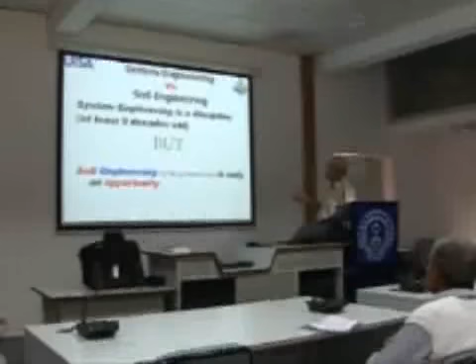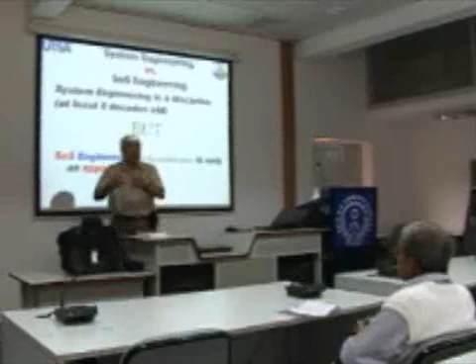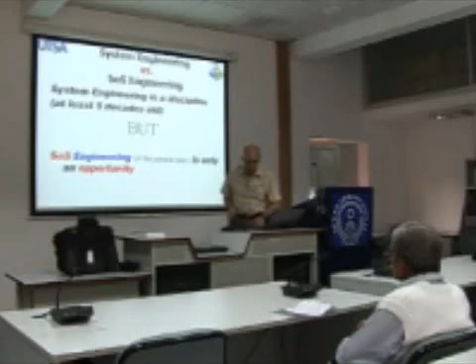I would like to make clear to our friends in the engineering field the difference between systems engineering and System of Systems engineering. Systems engineering is a discipline which is at least 5 decades old, but System of Systems engineering at its present situation is only an opportunity, meaning that we have a long way to go, because a lot of issues are not resolved, theory and application are not resolved. For example, here you see scholarly hits on Google up to the year 2005 on System of Systems versus System of Systems engineering.

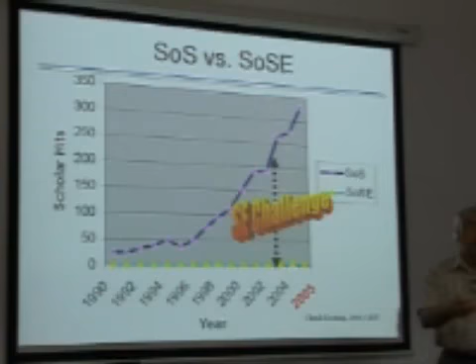The System of Systems hits are exponentially blowing up to large numbers, in this case around 300, while in System of Systems engineering at that time it was very low. So you see the big gap between systems engineering and the challenges involved here. It's our duty, it's my challenge, and people around the world need to close this gap between these two.

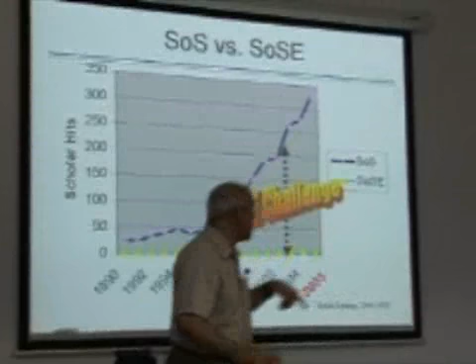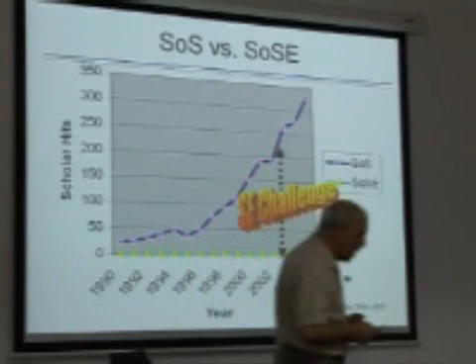Recently I Googled this concept myself, and 'system' is still over 1.5 million hits. This one is in thousands, only a few thousand. And if you Google systems engineering and my name, you get about 10,000 hits, and a lot of them are not relevant to systems engineering.

So here is system of systems. In order to go from system to system of systems, everything has to change. Modeling is a brand new idea, because you cannot model a system whose mathematical representation is not possible—you just have communication links between the two. Simulation, emergence, architecture, control, cybersecurity, network centricity, ethics—all of these issues have to be reckoned with, discussed, and a lot of smart people have to work on these problems.

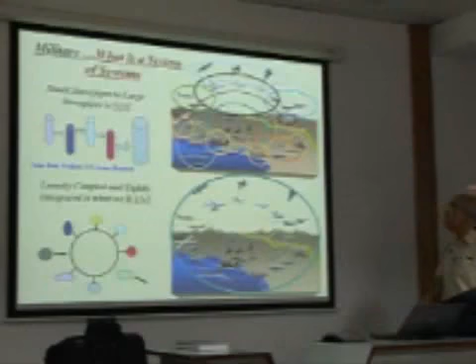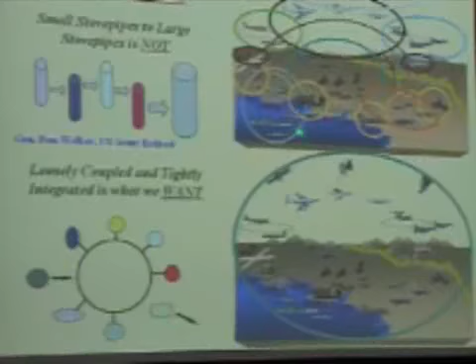So what are examples of this? Here is a military example of system of systems. In many applications in defense, especially in the United States, you have small stovepipes up to large stovepipes, a few systems here, a few systems there, but they're not really integrated into one umbrella, one together.

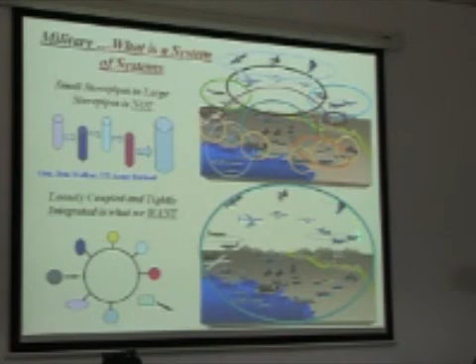What you want to do is couple them loosely and tightly, integrate them into what we call a network. So you put a network all the way around—everything you see there, you can put them all together. This will allow the American Army, Navy, and Air Force to work together, to put all their resources together. The word 'system of systems' is not my idea, my terminology—it's the Department of Defense of the United States.

My colleague Dr. Sahni, who was in Kanpur, heard a presentation from our friend Mr. Wilbur from Boeing. As you know, Boeing is trying to put the 787 aircraft into the market with problems, and the system for that aircraft is called E-Enable. E-Enable means that if this aircraft has problems in the air, it's connected by satellite and by ground to all the other aircraft and the control tower, and then the system from the cockpit will relay these things and warn them about the problem.

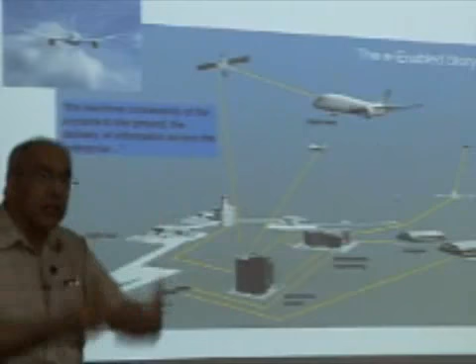The people on the ground know what is wrong with the aircraft before it arrives, and they make the parts ready, mechanics are ready, and when the aircraft comes, they fix it. So this is an integral part of it.

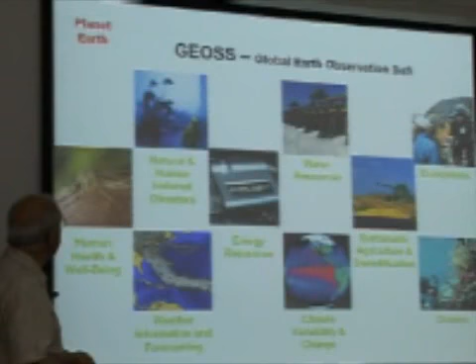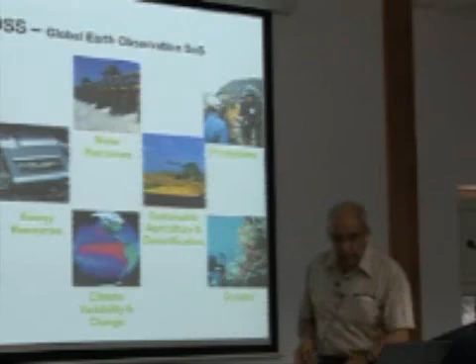Another application is what we call Earth sciences, a global Earth observation system of systems. Since the tsunami disaster we had in Asia, including India, the world has now been connected by a system of warning that gives early warning to countries like India so people can move inland before the tsunami arrives and causes damage and loss of so many lives.

An airport is a system of systems, consisting of baggage handling system, air control tower, plane with crew, freight, reservation, etc. So the entire airport is a system of systems. One aircraft is not a system of systems, it's only one system, but the airport is a system of systems. So is air traffic control—going from one airport to another is a system of systems which helps route the traffic and monitors the aircraft.

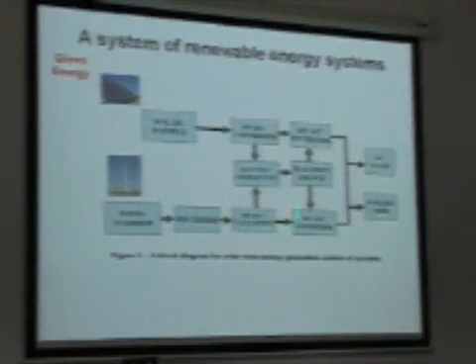So system of systems, you can also use the concept for managing them, to make the management more efficient. And that will save a lot of money.

You also have smart meters, which monitor the expenditure of energy in all your equipment in the house. This smart meter is connected to the local area network, which could be the province of Agra, and then it goes to the northern grid of northern India, and this spans the entire Republic of India. It can go from your home all the way to the Republic of India, network connected together. This whole thing is a system of systems. The objective is to make energy production and energy monitoring all automated.

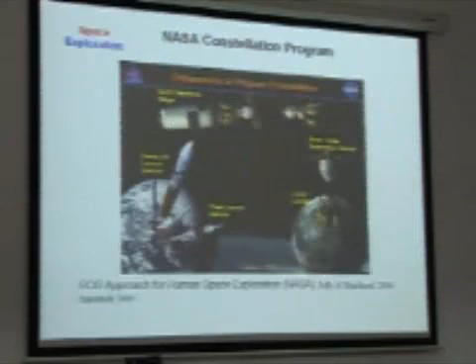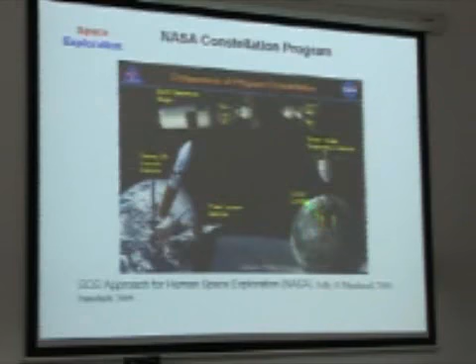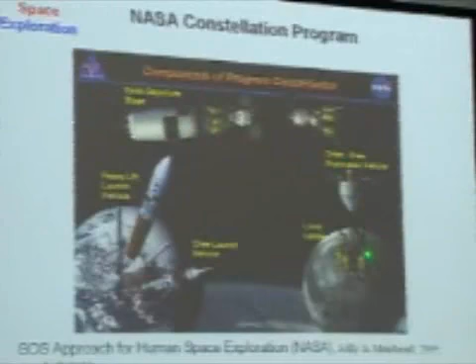If you want to go to Mars or the Moon, you can also use a system of systems approach for human space exploration. This is the Moon, this is Earth, and these are the rockets and vehicles which take experiments and humans to the Moon. So the entire group is a system of systems. These are all written in a chapter of one of my books, which I will talk about later on.

Modeling and simulation is another area that needs to be changed. You have to look at modeling a system where the mathematical representation of the constituents of the system are not physically available. Newton's law doesn't work, you don't have time for it, thermodynamics doesn't work. All you have is data going from system X to system Y, and that data is the only information you have. That data coming out of system X is the behavior of the model of the system at that instant of time, and you need to make the most of that information. So the philosophy of modeling has to change. That's the point I'm trying to make.

This is an application of a situation where a system of systems is used for recognizing a submarine which may belong to the enemy. All these parts of the system of systems are friendly, but this particular system belongs to the enemy. So in this case, you have not one goal, but two goals: the goal of this system is to find it, and the goal of the other is to hide from the enemy. So this is a situation where you have work done by two different groups. This was part of the work of one of my PhD students, Dr. Sridhar, a native of Bangalore, who is now working for Microsoft in the state of Washington.

This is another application of system of systems in the air transportation system. Every red dot you see here is one aircraft in the airspace of the United States. This is a visualization of the 2004 air capacity network for the United States.

This is a healthcare system of systems, where you have managed care companies, hospitals, patients, pharmaceuticals, regulatory agencies and government, clinics and nursing homes, and physicians. You have to connect them all together. Unfortunately, this is another example where you have contradictory goals. At least in America, doctors and patients need to have good care, but the insurance companies don't like to give it, they like to just make money. They would rather that you never get sick.

This is now a summary of what we are doing in Texas. Our research areas are air, land, and sea rovers. We have rovers which work under the water, as well as on land, with one exception. Then you have green energy activities, and another area which we recently started, cloud computing.

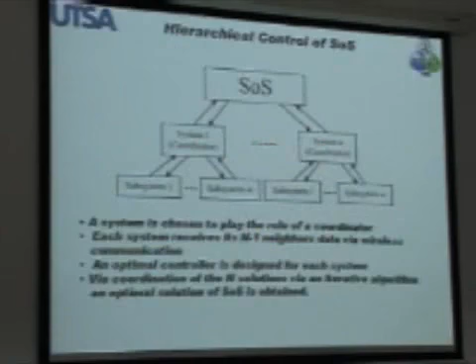Hierarchical control has been around since basically the 70s. Mesarovic at Case Western Reserve came up with the idea of hierarchical control, where you look at subsystems of a given system. From the top, their solution gets coordinated. From the bottom, they have isolated solutions. By exchanging information at levels, you iterate enough times to get a feasible and optimal solution.

In this case, a system is chosen to play the role of coordinator. Each system receives its n-1 neighbors' data via wireless communication. Then an optimal control is designed for each system. By coordinating this n-solution through an iterative algorithm, repeating communication of information, you come up with a solution. I'm going to skip this because it's all optimal control theory.

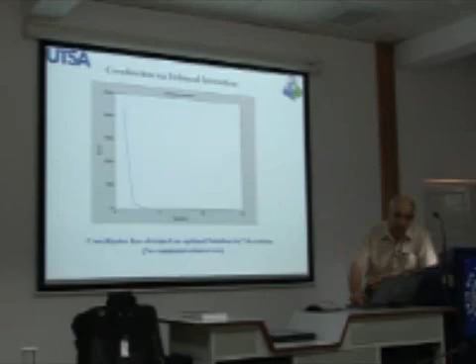So we go through the mathematical representation, which is assumed to be linear, time invariant, which itself is far from reality. But eventually, through a hierarchical control algorithm, communication error goes to zero. These 4 systems establish a normal channel of communication among themselves. At that point, the system has to be stable and has to give you the goal that you have been seeking, to connect them together in the first place.

These are some of the simulation results on Matlab and Simulink.

And you can also do decentralized or distributed control. Basically, you have n local controllers, which use wired interactions, wired connections, but you also have a global controller which uses wireless interactions, which will help give you an additional control component based on wireless information from neighboring systems. We call that global control.

So a combination of local and global control will help you, and you can actually show, depending on the amount of delay in the wireless connection and the behavior of the controllability and observability properties of the system, that this system can be stabilized, will become stable.

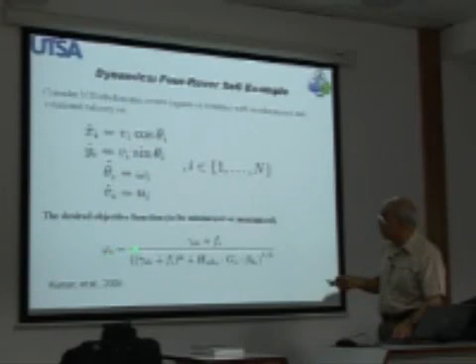A simulation of this was done by one of my students at Kanpur, Dr. Anjan Kumar, soon to be called doctor, and this is the objective function. These are the dynamics of n of those. This is the solution to the optimal decentralized controller, and these are some simulation results.

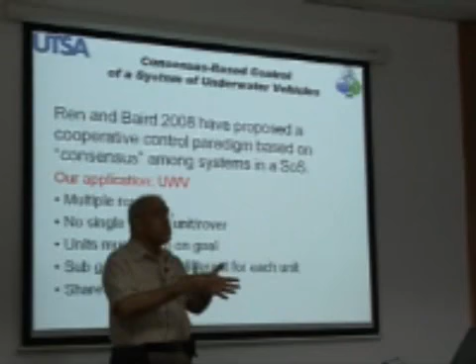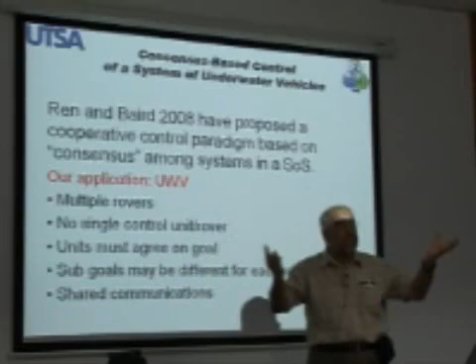Consensus-based is an area which my colleague Dr. Hadaegh from JPL has been pushing for another system of systems which he calls, and now is becoming very popular terminology, formation flying systems. Basically, you can bring telescopes, you can bring many different space vehicles into one formation, which will allow you to do a lot of good things that a single one of them cannot do. So consensus-based control has been used for that, in what we call cooperative control mode.

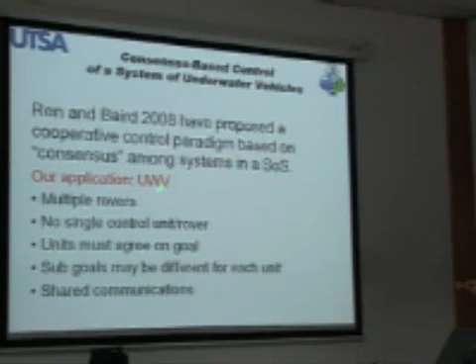In our case, we used it for underwater vehicles. Applications of underwater vehicles are, for example, going through this consensus communication among them. Multiple rovers are involved; no single controller unit or rover can do all the job. Units must agree on a goal. Sub-goals may be different for each unit, and you have to share communication among yourselves.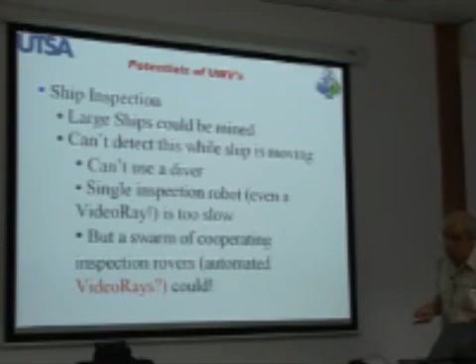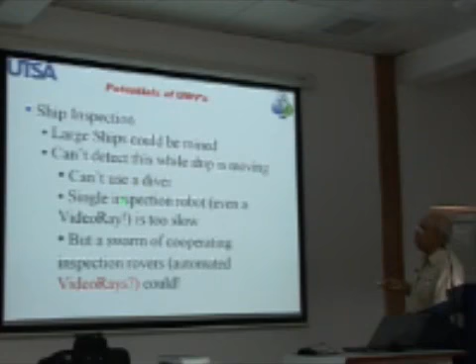So here are some of the potential applications: a large ship where you need to detect potential problems, detect maybe attacks or bombs or what have you. No single diver can do these jobs. A single inspection robot cannot do that, and it may even be too slow.

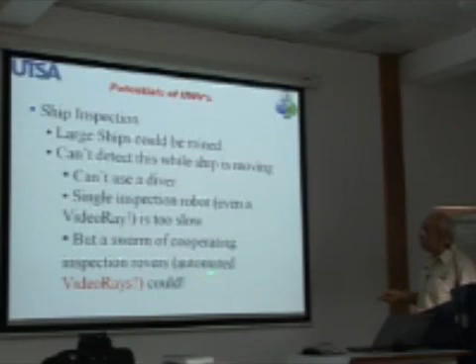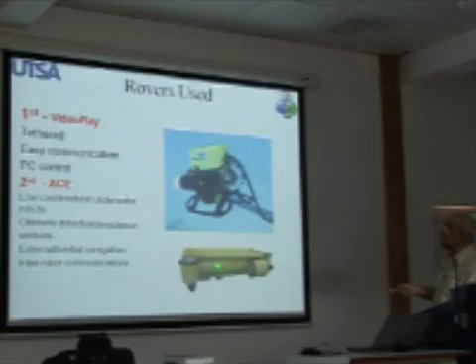So you want a swarm of cooperative inspection rovers, automated, for example, VideoRay robots which could go around it. This is a VideoRay robot. We have 2 of those in Texas, and this is an autonomous one which we built ourselves. So we have 2 different kinds of underwater rovers.

Okay, and then it goes to the next and the next. Ideally, you'd like to have a complete three-way talk directly, but normally you cannot do that, so some of them may not even get the information. That's what makes the job of control very difficult. When you go through the cycles of the token passed from one vehicle to the next, you eventually look at an index called J, which needs to be driven to 0.

And then you basically come to the point where, if you want to increase the speed of the rovers, you shorten the distance and they move faster and faster.

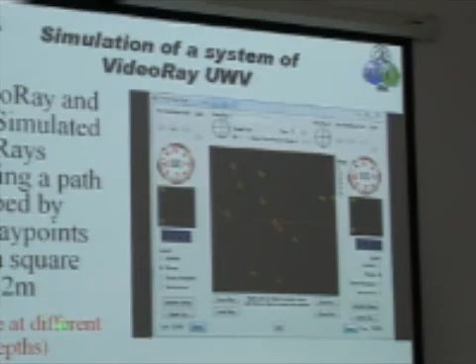Here is a simulation of that scenario, with a combination of real underwater vehicles and simulated ones. Those in the circle down here, those two are real UWVs, and the rest are simulated UWVs. We did that for different depths—they all have different depths—and we use consensus-based control to run this controller.

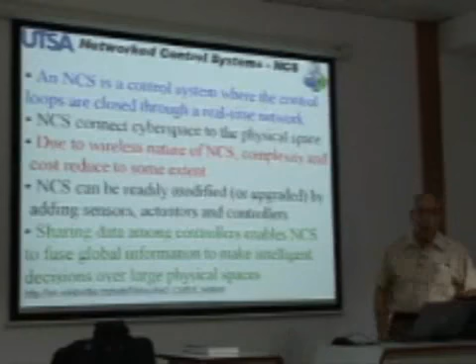And now here's the network control. Network control is an integration of cyberspace and physical space, as it is in other ways. But due to the wireless nature of network control systems, complexity and cost can be reduced to some extent, because the information that you normally want to go from one system to another goes through the communication channel—you don't have to dynamically represent it in the model, for example.

And this can also be modified. You have a situation, as we said, where the control loops are closed through a real-time network. That makes it so tough. Sharing data among controllers enables these systems to fuse global information to make intelligent decisions over large physical spaces.

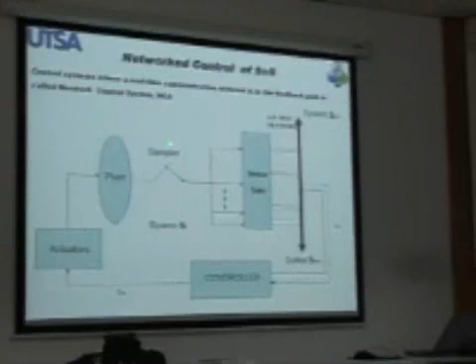This comes from Wikipedia. Here's a block diagram of a typical network control system. Here is one system—it has a sampler. You have information coming from sensors. Some of the sensors are connected back to the system, but some, this dotted one, go through an ad hoc network. That ad hoc network has nodes on the sensors, on the actual controllers, and also nodes from other systems, I-1, I+1, and so forth.

The controller, after a time delay, receives the information from the sensors. It does its own implementation of control laws and sends it to the network through a time delay from controller to actuator, which is on the plant. Therefore, you have two delays—we call them forward delay and backward delay, and they are two different animals. They cannot be treated the same way.

As you will see, the backward delay can be handled by a Smith predictor. The forward delay has to be handled by a non-Gaussian distribution of noise, which we call Levy's alpha stable distribution. Communications could be by field buses, control area network, local operating network (LON), Ethernet, Bluetooth, Zigbee, and so forth. My students are actually using most of these in the lab right now.

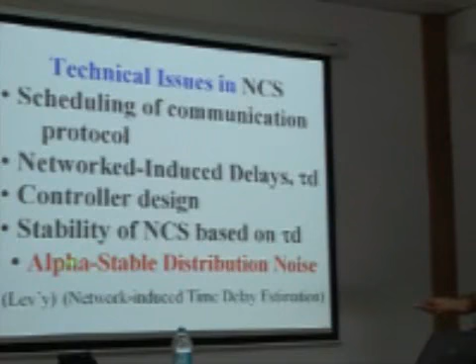Fortunately for this problem, theory is there. You can have the delay in the network be less than an upper limit to guarantee stability. I'm actually teaching that in my classes this semester. This is the forward delay, which has to be estimated using alpha stable distribution of noise. This theory came into the mathematical world from a mathematician called Lévy in the 1930s, used for estimation of network-induced delay.

For my students, before I taught them network control, I had to teach them control, modern control, time delay control, and then bring them into real network control issues. Let's say you have a plant here, a controller, in this case a PI controller, and a delay. Unfortunately, delays are not lumped values which you can put your fingers on. It's distributed, it's random. It's very difficult in network control systems, which is a candidate for system of systems.

Without the delay, the system is well behaved because of the location of the poles. But when you add the delay, the system becomes unstable. That's what we are trying to avoid in real-time system of systems control.

What we did next is approximate that time delay using what we call Padé approximation. We got the same behavior.

Next, we used a Smith predictor to reduce the effect of the delay. A Smith predictor works like this: you come up with a model of the plant, a model of the delay, find the difference, and feed that back. This came from a control engineer named Smith in, I think, the United Kingdom in 1957.

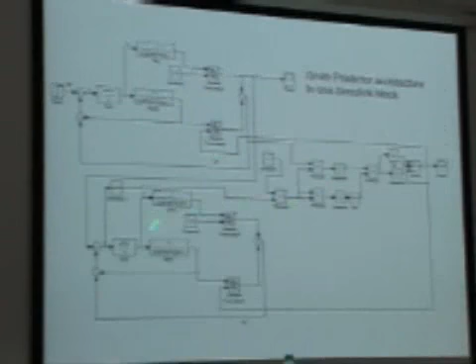Now, if we put an adaptive loop on it, shown also here, we have the plant, the Smith predictor, and all the logics and dynamics for the adaptation using least mean square minimization, sort of like a gradient approach for estimating the value of the delay.

We were then able to play around with various different delays, and each time the system remains stable — from 1.8 seconds to 12 seconds to 300 seconds to a random variable, the system is still fairly stable. Next, what we will do is make that delay follow a non-Gaussian noise.

Namely, alpha stable. This is typically how you can represent the delay in a computer network, like your internet usage. You see these are the bursts I was talking about. Now there's a parameter called alpha — if alpha is equal to 2, this becomes Gaussian. So Gaussian is a special case of the alpha stable distribution.

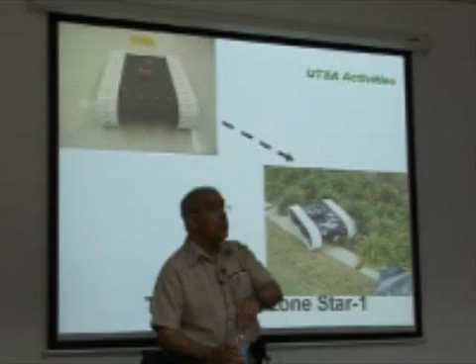Now let me show you some of the projects we are doing in Texas. Since I've been in Texas for the past four years, we have hosted a number of international students, including Anjan Kumar from Kanpur, who came for eight months to San Antonio and worked with my students. One advantage he got from his experience was getting his hands on the hardware a lot — he learned everything inside out about GPS, and developed a lot of things using it.

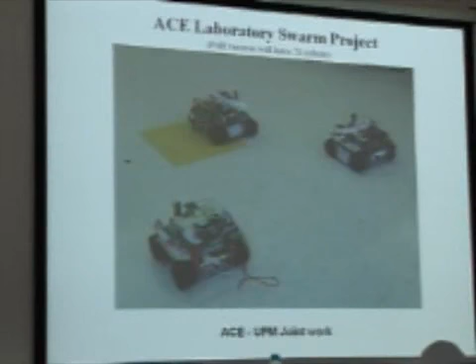So what we do in Texas with my students is buy a basic vehicle with just four motors, and load it up with our own electronics and sensors. This becomes our finished product. This is a swarm of robots, which will eventually have 26 of those, wirelessly connected together by Zigbee, connected by one single laptop, and they have consensus communication among them.

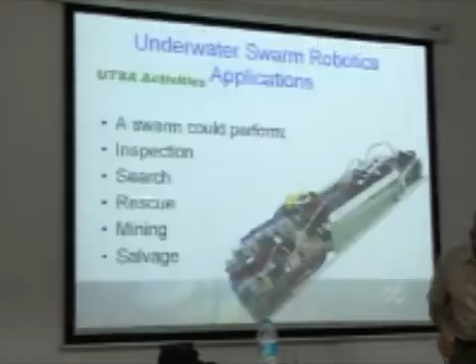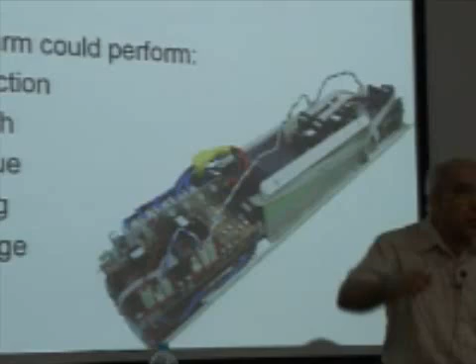This is a picture from our underwater robot, which was built and painted by my student from Australia, another visitor, Matthew Jordan. Here's the inside of the underwater robot — this is the guts of it, with a single board computer in a plastic tube, which is the main body of the robot.

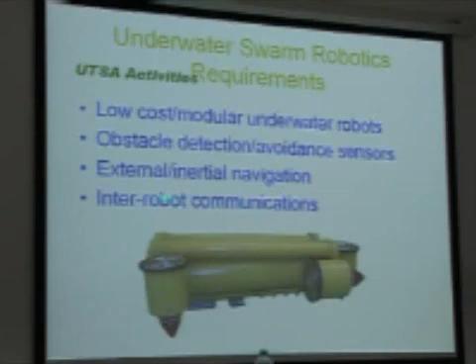Here are its characteristics: very low cost, under $500, with obstacle detection and avoidance sensors, external inertial navigation, and inter-robot communication. They're all there — I'll skip this.

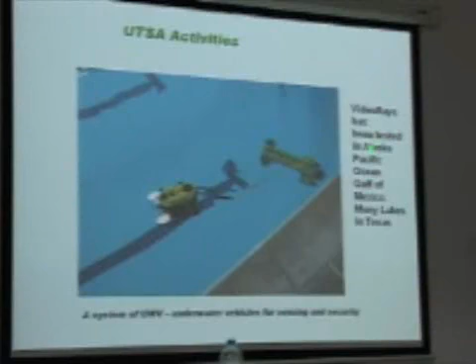These are some scenes from our application in the swimming pool. I might also add that our vehicles have been tested and worked in Alaska, in the Pacific Ocean, off the coast of Hawaii, in the Gulf of Mexico, and in many lakes in Texas. So we have also gone into real oceans, real water.

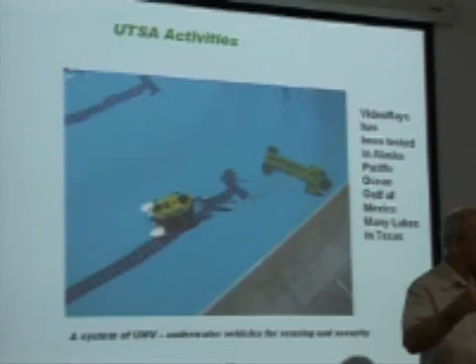Here is a scene from some of the students. In fact, you see 3 Indian students there. This is my PhD student, Kranti Manoj. I think he's from Bengal, whose master's was in underwater communication.

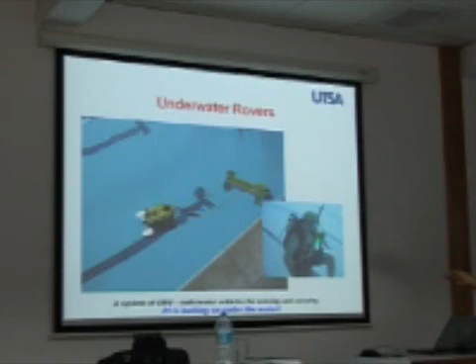Now he's doing his PhD on cloud computing. Here is another scene, and here is myself, which I also go there. I used to be a novice diver. I went there and helped the students. When they finished the experiment, then I swim for exercise. Not bad.

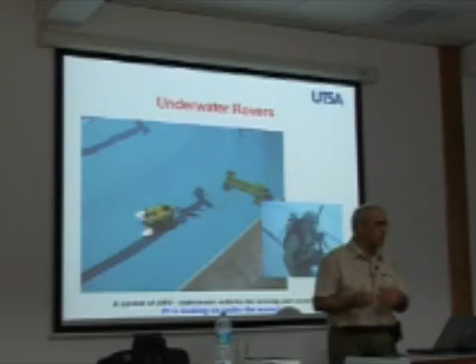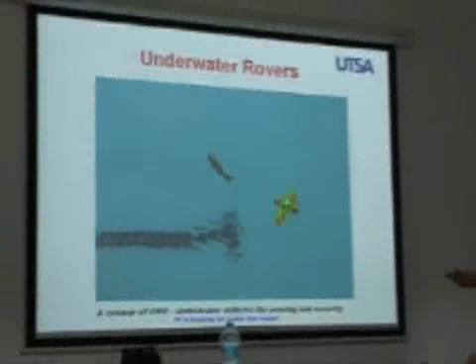Again, this is another scene of the rovers in action. Students are working, and here's a laptop which is connected to the underwater robot. There you can see under the sea with the various cameras which are connected. This is a torpedo, a small mechanical electronic torpedo, an electronic fish which we use for obstacle avoidance underwater by the rover.

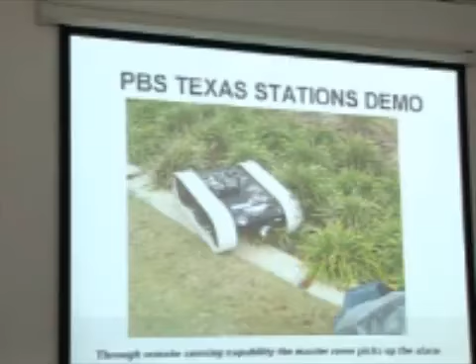This is a scene from a public broadcasting system television show in Texas, which I'll show you later on in the movie. Here's another Indian student who built this robot himself, Vikram Raghavan, who is now working for an oil company in Houston. He's building a robot to go into the oil pipe to look for leaks of oil. Isn't that fantastic?

Unfortunately, he was so good he was absorbed, and I couldn't afford him anymore to keep him as a PhD student. So I'll show you this movie later on, so we'll worry about that later.

And the objective is to have a swarm of UAVs. We want to have them do autonomous flight, and we want to have consensus-based control of them as a formation.

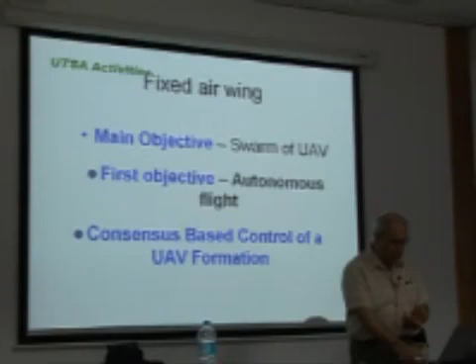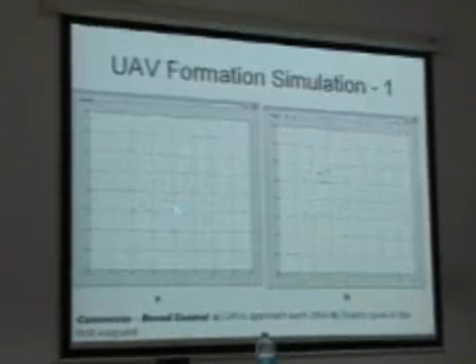This is a recent simulation of consensus-based control of the formation of UAVs. Here, the blue ones are 3 UAVs. The red parts are obstacles and other things going on in the air. Then consensus has been established among these 3 UAVs, and they create a formation.

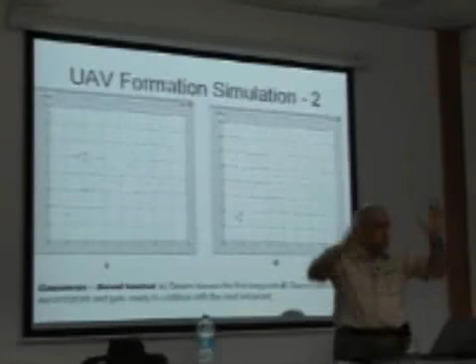Then we have waypoints here and other places where the formation goes first, like so, or they come back here to another location. What we want to do now is real-time application, because we have 3 UAVs we can put it all in there. Eventually, we also want the UAV to talk to the Land Rover through a communication link.

We also are building our own UAV. A group of students, for about maybe $4,000 or $5,000, we also put a generator on it. We have onboard energy generation. And we want to send a team to a national competition next year to compete against other student groups like Stanford or other universities with UAV competition.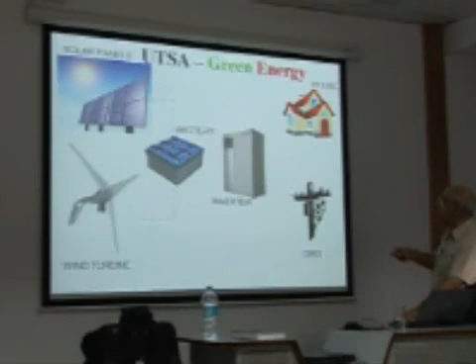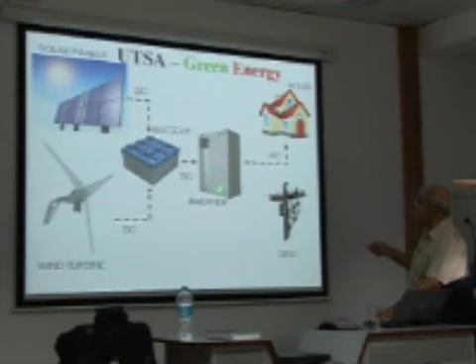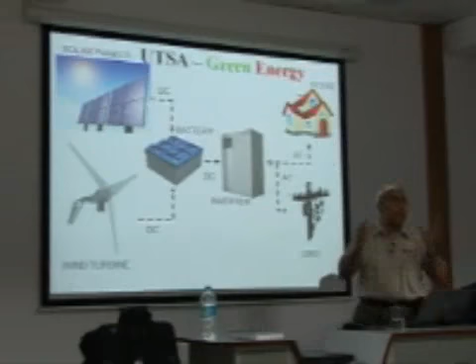Our recent activity is green energy, solar and wind, and soon fuel cell as well. What we want to do is get a solar system, a wind tower, connect them together wirelessly, and put their DC voltages into a stored battery. Then it can be inverted to AC through an inverter that comes with a package, and then you can energize a building on campus, or you can connect it to the grid. This system will be built in about a month or two in San Antonio.

More recently, we have a proposal due tomorrow in Texas for over $1 million from the state of Texas. We are asking them for $1 million to generate 187 kilowatt hours of green energy on campus, enough to energize University Center number 3, a student union building, and expand our previous design offices on campus.

We are all connected together, and we have a control center for the entire network control of this energy producing system. We use LabVIEW from National Instruments to check everything, from wind direction to wind velocity to solar radiation, to all the currents and voltages, to see what's going on with the system continuously. We may have two control indicators, one in the big building and one in a smaller location.

Now, what is cloud computing? This is our last area of research. It's an extension of computer systems to virtually make available to you a lot of computing power which you can rent on an hourly basis. If you have a big problem you want to solve here in Agra, you don't need to buy a computer—you can buy time on somebody's server, which could be in Singapore.

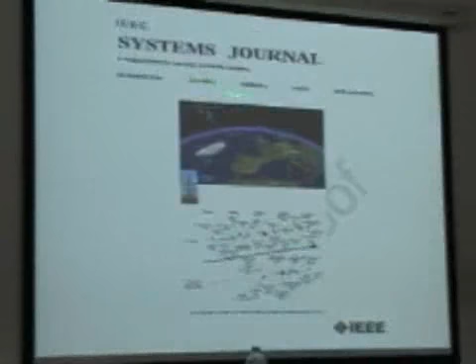In 2007, I established a consortium called International Consortium on System of Systems, where I put academic institutions and industry together to look at some problems. I also invited international partners like India, Hungary, UK, Spain, Mexico, and so forth, and national academies and government. The idea is for funding agencies to come and see what we are talking about without asking for money. Once they understand what we are doing, they get excited, go back to their offices, and put money into our ideas. Then we are ready to apply. That's the idea.

But when I try to sell that idea to industry in America, they say no, no, no, we don't want to be part of that. It's called international, we don't want to be international. We are worried about security, about ITAR and so forth, export control and so on.